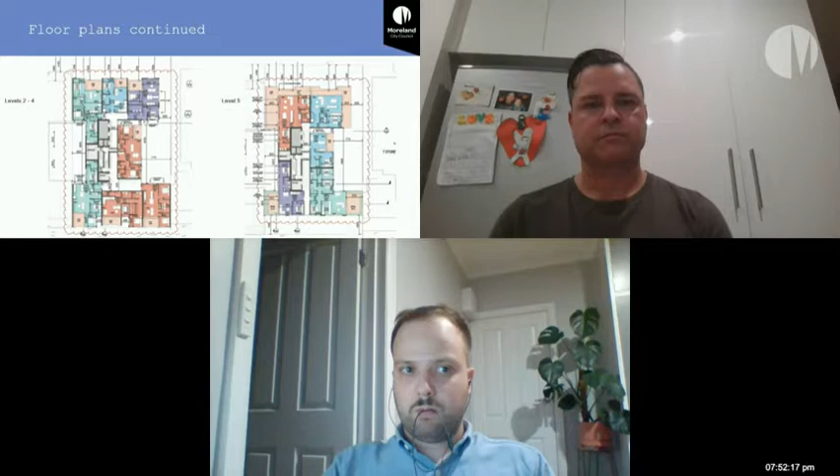Thank you, Mayor Riley. I might share my presentation again because that's got the plans and I can speak to them. So can everyone see my presentation? Thank you. Yeah, yep. Sorry, I've lost my mouse, but that's okay. I'll speak through it. So on the left image...

You've got the level 2 to 4 plans. I'm not sure how clear it is, but there should be louver style screens on the bedroom windows, in that middle section where it's set back 3.5 metres. I'm not sure whether that's clearly shown.

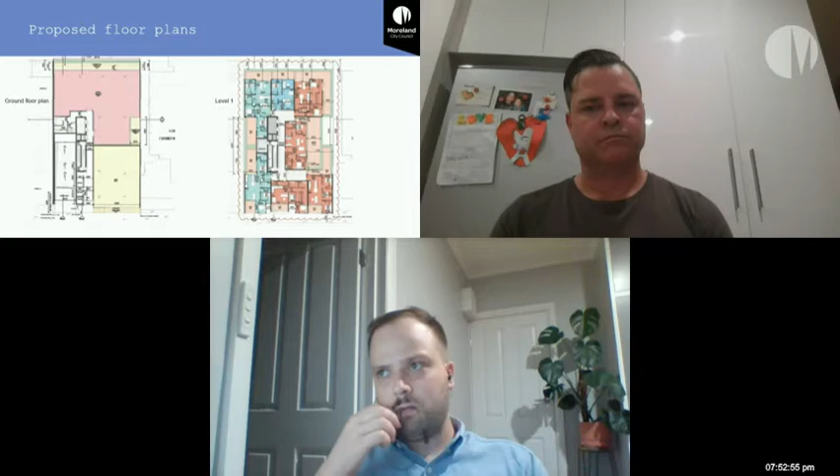Can I just ask a question of the Council Officer? I think what Adam was talking about was from the communal garden and looking upwards. He felt that the screening protected the units below, but not, I get the impression that he's further up, so it's what's been done to try and address overlooking or looking up from the garden to bedrooms above.

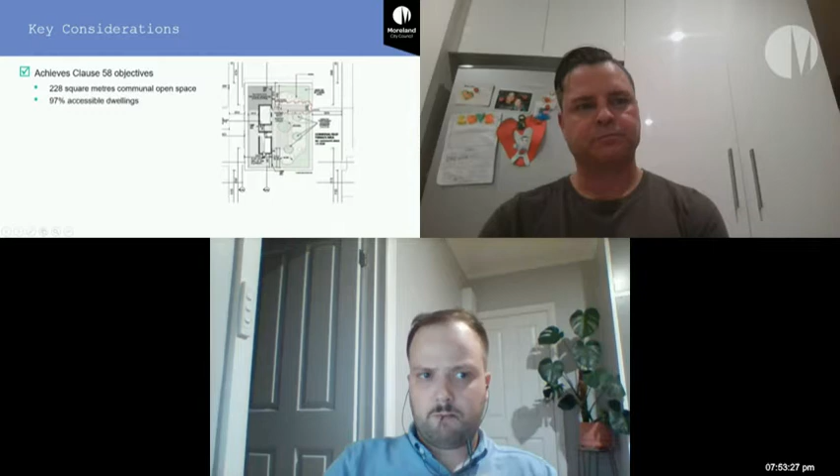Sure, so that's—I've got an image of the communal roof terrace. There is plant and services along here, and I think that, I can't read it, I'm really sorry, but that's where the communal area of the roof terrace is. I think from memory that was set back about 16 metres.

I might need to get to the plans. So could I quickly respond? I'm a bit close to the screen to be able to advise, but the distance between the area of the rooftop deck to the windows of other residents is beyond the 9 metres required to be screened by the planning scheme. But despite that, as was explained by the planning consultant from Tract Consultants, there is a screen device on the western side of the rooftop deck to 1.7 that would comply with the screening requirements of ResCode. Thanks.

Which, if I may, just briefly, means that anyone standing in that space can look straight up into our bedrooms. And I believe a very small addition would make all of the difference. I think a very small addition to that height would completely obstruct the ability to look up into our bedrooms. I'm 1.8 metres tall, my eye height's about 170. If I stood next to the current screen, I could absolutely look straight up there, and I'm a medium height person. I honestly think a tiny amount of difference, like probably 40 or 50 centimetres addition, would probably make all the difference and obstruct that altogether. It would be very easy to do the modelling from the elevation.

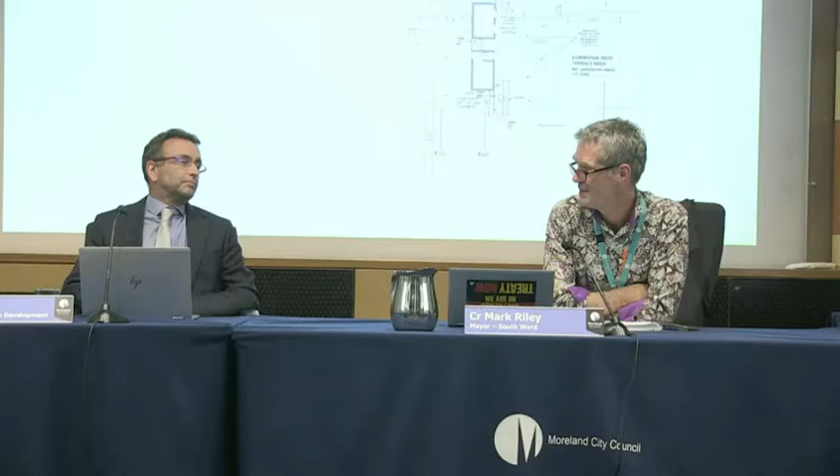You had some concerns about following how, through the process, objectors' concerns are being resolved leading up to tonight. I'm just going to ask Philip to clarify that, because my understanding is that often you don't get to know how everyone else's concerns are being addressed unless you're talking to Esha or the officers. So I'm just going to get Philip to clarify from their point of view as officers.

Thank you, through the Mayor. As part of the consultation on the planning process, the officer dealing with the planning application provides their direct line as part of the documentation sent out to immediate neighbours, available to assist with advice in relation to compliance with the planning scheme and the officer's assessment. The officer report before tonight's meeting also seeks to provide a level of response within the constraints of how long that report can be within the agenda. But if there's further detail lacking after the agendas come out, it's more than appropriate that you contact officers, and we're more than happy to speak to you about concerns.

Thank you, I'll call tomorrow. I've got 5 people that I've spoken to, I've got all the dates and details. This has been on my agenda since the very first submission and objection I made in 2020, and it appears that nothing's been changed. I've been trying to seek clarification, no one's given me any until tonight, and it's very clear that nothing's changed on that 170 centimetres, despite talking to 5 different people at the council. But I will call Esha tomorrow and escalate if need be. Thank you.

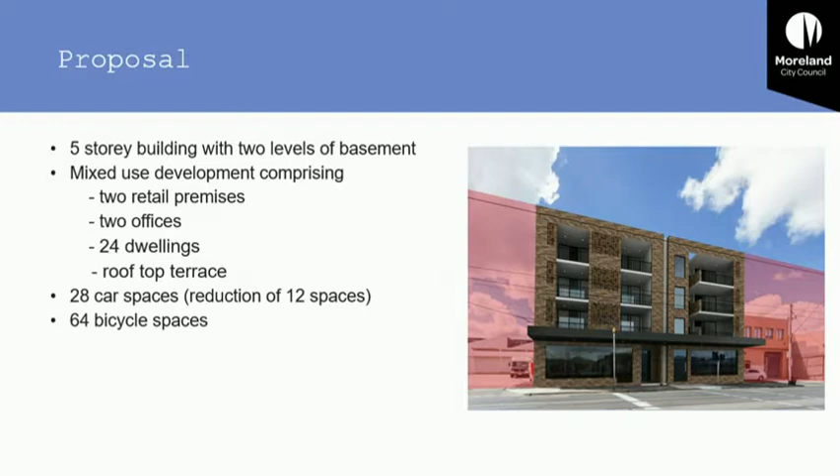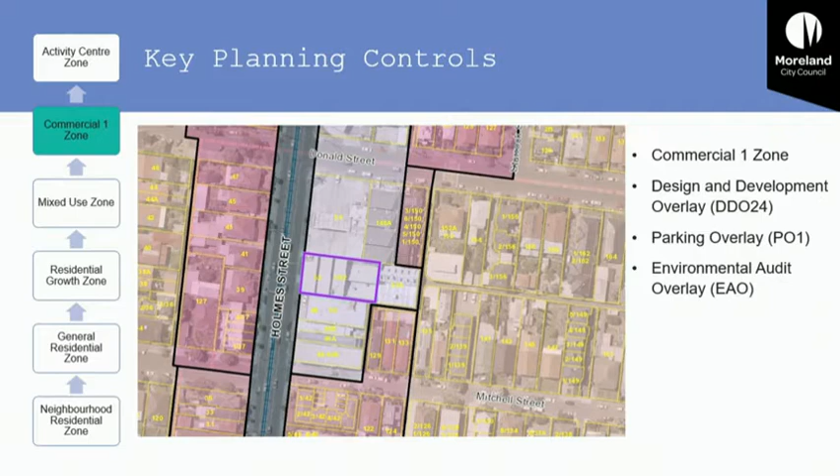There's a provision of 28 car parking spaces, seeking a reduction of 12 spaces overall, and 64 bicycle spaces provided within. In terms of key planning controls, the site's within the Commercial 1 zone, and it's also covered by the Design and Development overlay, car parking overlay and an environmental audit overlay.

In terms of the strategic policy setting, the site is located in an area of significant change in accordance with our Housing Framework Plan at Clause 02.04, where housing diversity and growth and change is encouraged, particularly around activity centres as per the 20-minute neighbourhood principles.

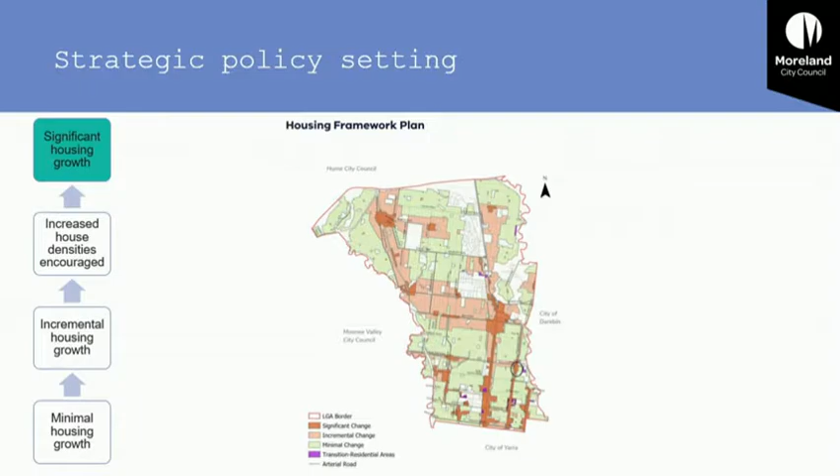It also relates to DDO 24, the Nicholson, Holmes Street and Moreland Road Neighbourhood Centre, which has a preferred overall height of 13.5 metres, equivalent to about 4 storeys.

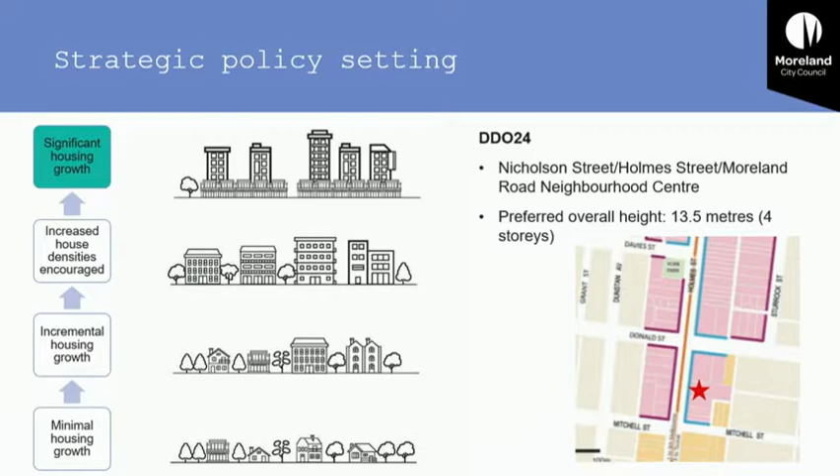Kylie, just come back a bit because it's popping. Yeah, they pick you up pretty well.

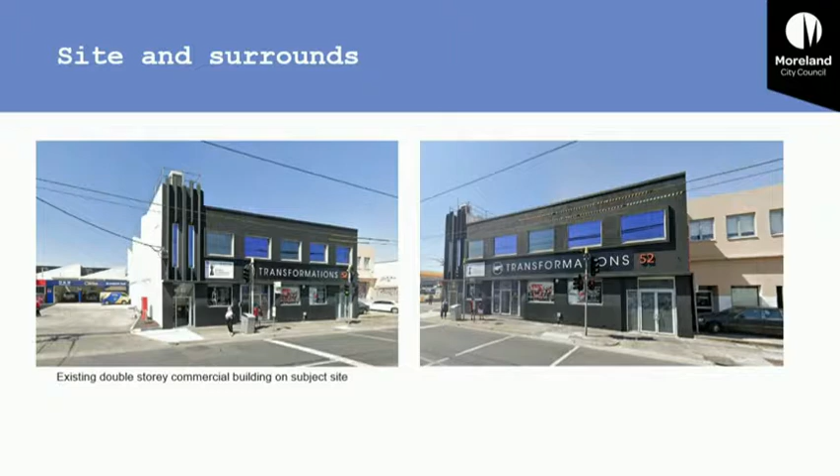No thanks. So here's some images of the property. We can see it's currently a 2-storey commercial property, now operating as a gym as I understand, with a first-floor office. To the north side is the Shell service station, and to the south side we can see those commercial properties, which are in the range of 2 storeys.

In terms of consultation, we received 13 objections, shown on the objector map on the right-hand side. The issues raised mainly relate to the height, the building being out of character with the area, car parking reduction, loading and traffic issues, use of the laneway for vehicle access and safety concerns, dwelling design within the building, off-site amenity impacts namely overshadowing, overlooking, visual bulk and noise, and some concerns from the service station to the north relating to impacts, particularly during the construction phase.

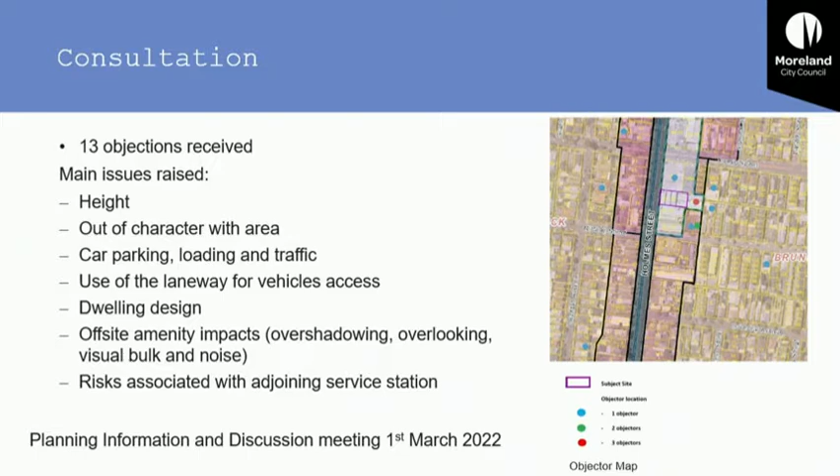There was a planning and information discussion meeting held earlier this month. In attendance we briefly saw Councillor Conlon, and we had 4 objectors attend. The key considerations relate to building height and setbacks, off-site amenity impacts, car parking and vehicle access, and design merit itself.

The key issue relating to building height is that the Design and Development Overlay has a preferred height of 4 storeys, and this application seeks to exceed that by 1 level. As you can see with the south elevation plan, looking from the opposite side of the street, we've got a sight line here showing that the 5th level, which is recessed, will not be visible.

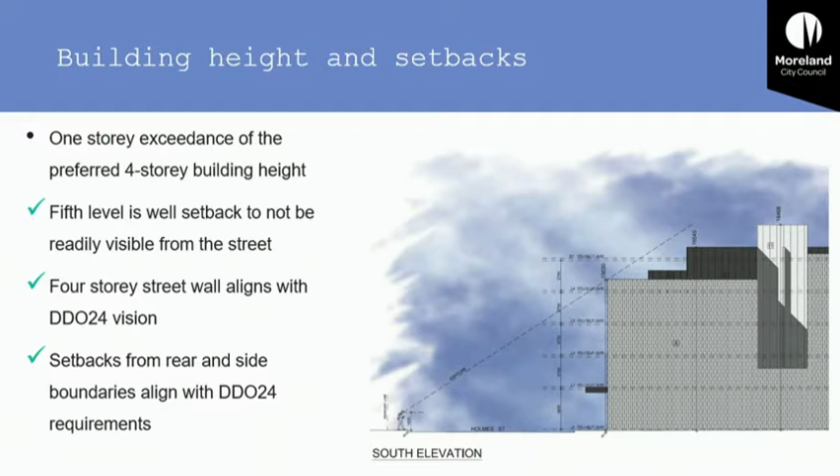So the 4-storey street wall height aligns with the DDO vision, and also the setbacks from the side and rear boundaries align with the DDO 24 requirements.

In relation to off-site amenity impacts, this image shows the shadow diagrams, and you can see the shadows are quite minimal and certainly don't impact any of the residential interfaces to the west in the late afternoon hours. In terms of overlooking, we can see from the balcony areas where there are overlooking opportunities, with the 9-metre arc shown in this diagram, that there are no views to any sensitive spaces within the requirements of Res Code.

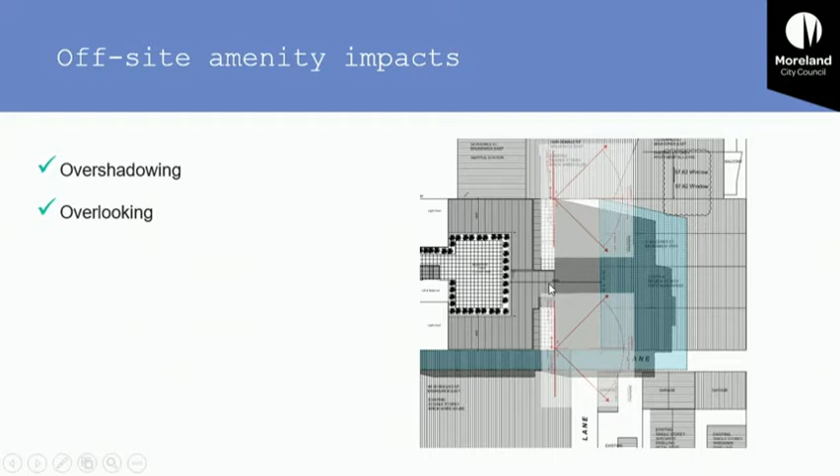In relation to car parking and vehicle access, we can see here one of the basement level plans. All the car parking spaces are straight in and out, not car stacker reliant. We've also got some disabled parking spaces, which are used for commercial use.

In relation to the reduction in car parking sought, it's supported by Council's development engineers, namely because the site is located on the PPTN, where there's good provision for public transport options, and there's also a really high provision of bicycle spaces on site.

In relation to the use of the laneway, this is actually encouraged by Council policy, and laneway use for vehicles in and out of buildings is quite a common occurrence.

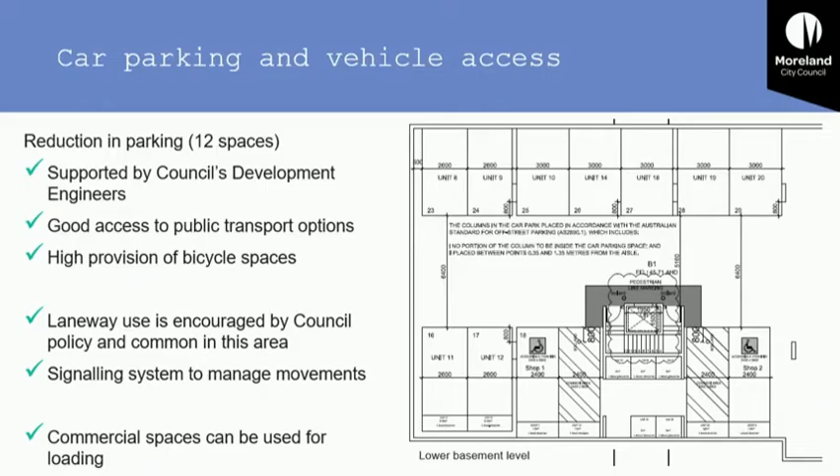One of the conditions of the recommendation is to include a signalling system to help manage those movements in case there's any conflict along the laneway. The commercial spaces can also be used for loading purposes when required.

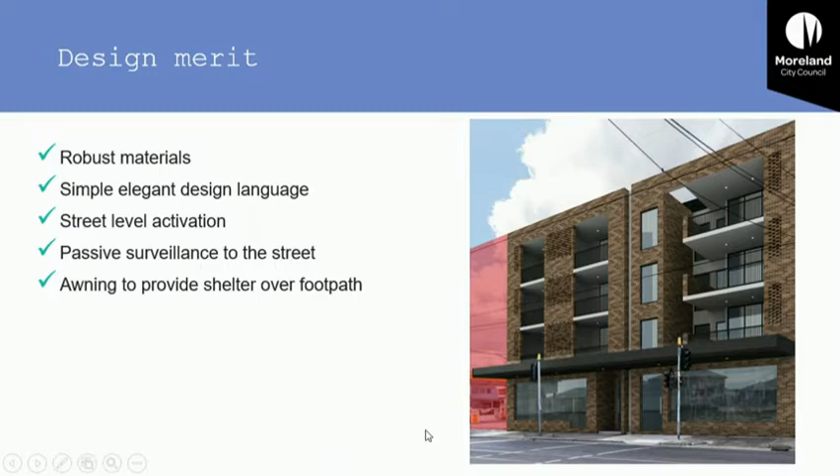In terms of the design merit, there's excellent materials through the brickwork, so they're quite robust and strong. We've got a simple and elegant design language, supported by Council's Urban Design Unit. We've got good activation at street level with ground floor shop frontages, and also passive surveillance to the street from properties and balconies fronting onto Holmes Street. And we've also got an awning providing shelter to the public realm on the footpath.

Given the strong alignment with strategic planning policy, it's recommended that a notice of decision to grant a planning permit be issued for the proposal, subject to the recommended conditions, which seek a high level of compliance with the Res Code. High levels of ESD are also delivered. Risks associated with the adjoining service station are properly addressed, and vehicle access is suitably managed.

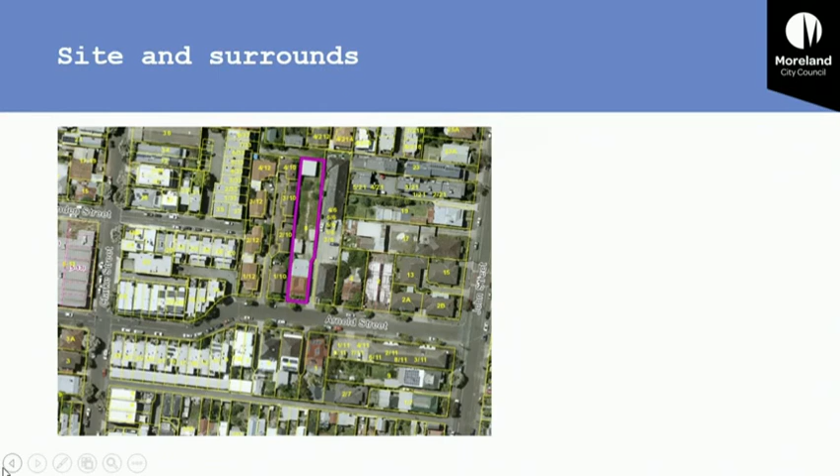We're just going to ask you to pause for a second. We're just getting clarity about why we're getting that echo. Thank you, sorry about that. Seems to be the ghost in the machine tonight. Ladies and gentlemen, please be patient, we'll try and get that rectified. Thank you, councillors, for your patience this evening.

Should we good to go? Can we just try that now, Esha, and see if it's working? Go on, dare you. Thank you, Ray. Riley?